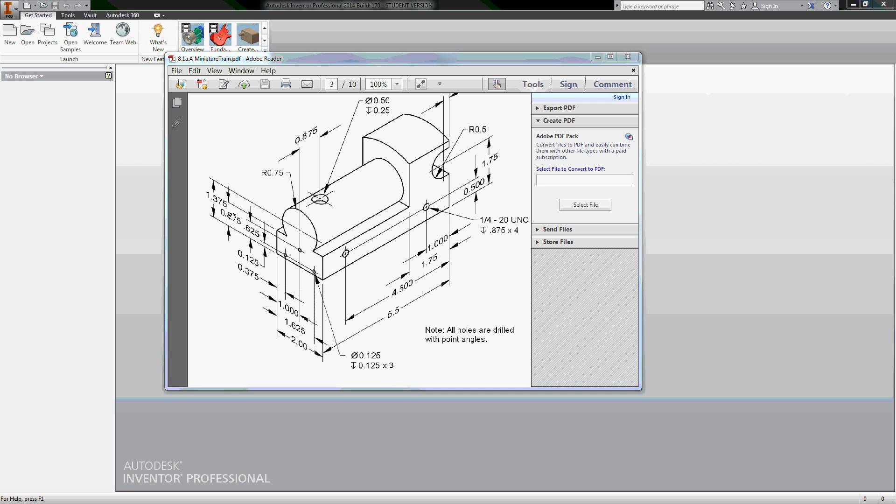So if I look, the rectangle has a dimension of 2, and over here it has a dimension of 0.875. So I'm going to go ahead and build that rectangle first with a sketch. I'm going to hit new, do a standard part, create a sketch, and make my rectangle. So my rectangle was 2 by 0.875. Alright, so there's my rectangle.

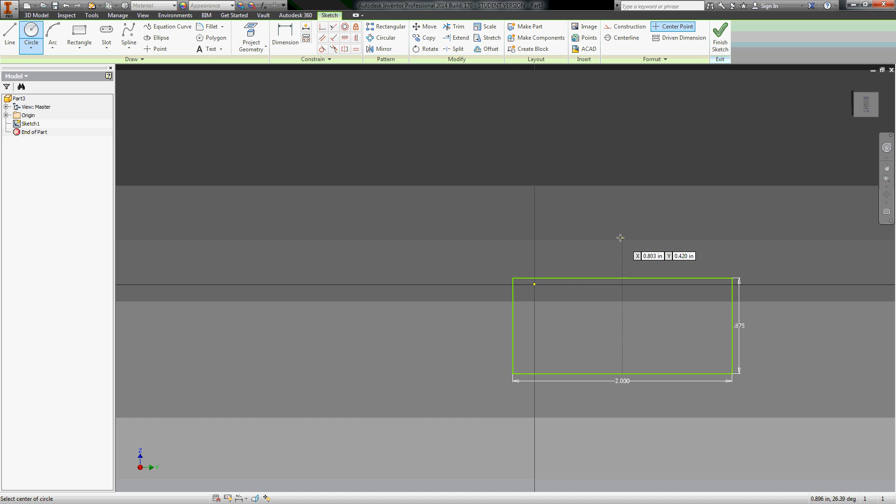Now I'm going to create a circle, and the circle was centered up, so I have this little dotted line right here, and I'm going to look at my dimension for my circle. It says a radius 0.75 because it's really only an arc. So I wanted a diameter of 1.5. So I'm going to click on this, dimension it and make it 1.5, and that gives me the right size circle that I need.

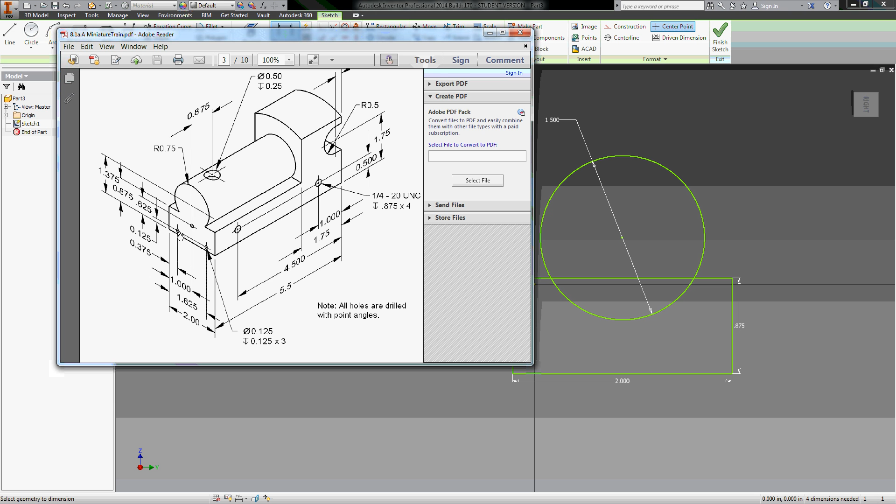But the problem is I need to place the location of the center of the circle. If you follow the mark over here, it comes to 1.375. So from the bottom of the train to the center of that circle, or the center of that arc technically, is 1.375. So I'm going to dimension that from the bottom here and make that 1.375. And we should be all centered up and ready to go.

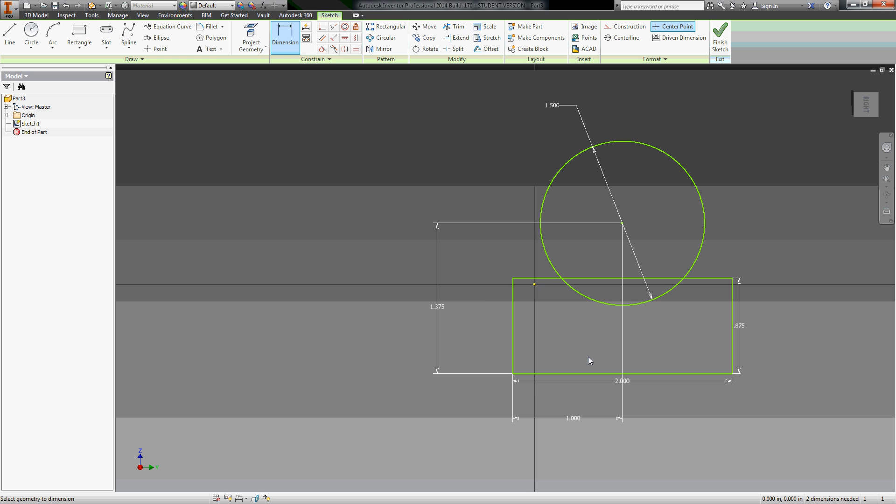If you want to be safe to make sure that this is locked on the middle, we can always click here and here and come down and make sure it's 1, and then check it off, and that locks it in. So now I got my circle and my rectangle. I'm just going to come up here and hit trim. I'm going to trim out the bottom of the circle, trim the front of the rectangle, and there is my sketch that I need to extrude.

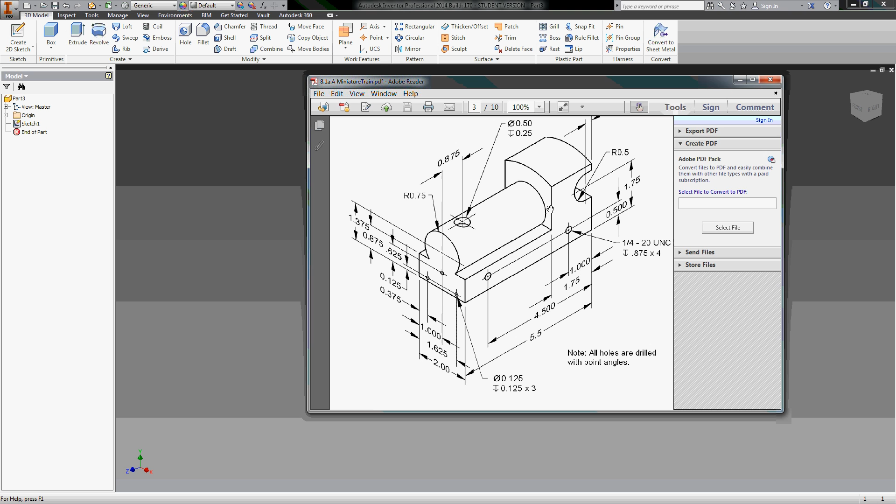So I want to extrude this back. What's the distance? I want to extrude it from here to the edge of this piece right here. Well, the total length of the train is 5.5, and from the back of the train to the cabin is 1 inch. So I need it to be 4.5 inches. So I'm going to extrude, click my region, and change it to 4.5 inches. Okay, and so far we have the front of that train.

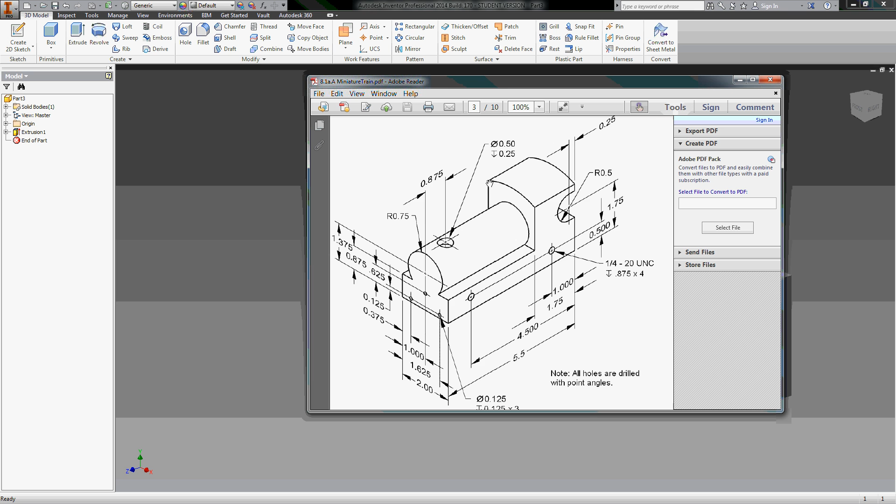Okay, now for the back part of the train, I want to take a look at my image again, and here it is right here. You can see it's rectangular in structure coming out here, but there's this arc. If we go down to the next page, you get a little better information on the arc. So we know that this is the full width of the rectangle, but how high this whole thing is, is our problem to figure out.

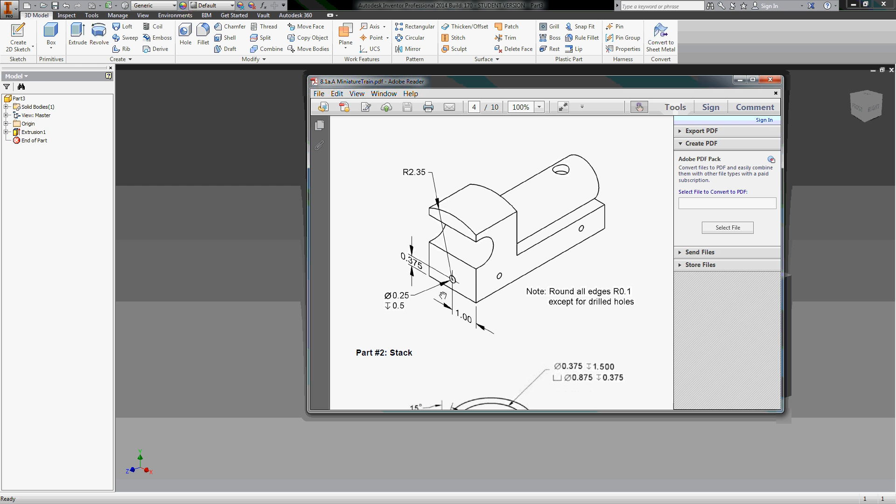Well, the way you can tell is if you see this point where this hitch is going to be, it's actually an arc up here, and it says it's a radius of 2.35 starting at this point right here. And that point is 0.375 up and 1 inch in, or centered in. So I'm going to make a sketch right here. I'm going to flip this over.

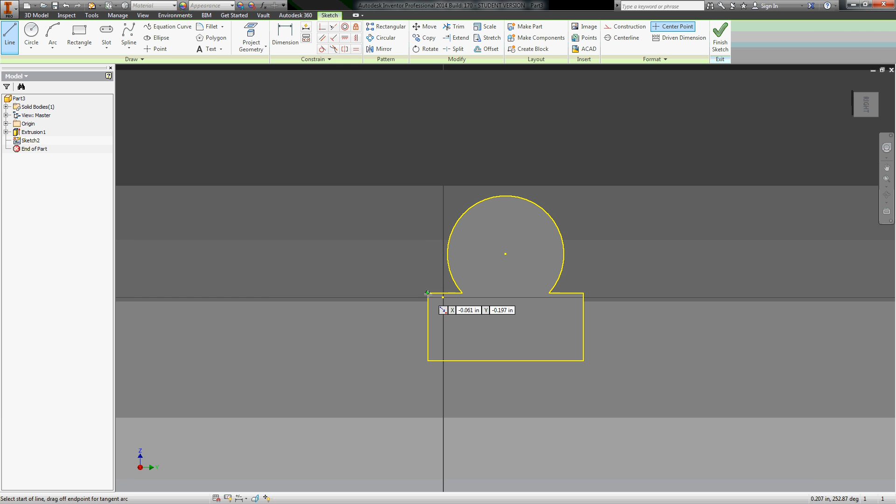And then I'm going to take a line up here. Oops, I didn't want to do that. Sorry about that. I'm going to extend my line up from this point up. You know, we can trim stuff off, it's not a problem. Do the same on the other side.

And then I'm going to go ahead and drop a point down right here, and it should be centered up. And the height of that point we said was 0.375. So I'm going to go ahead and dimension from here to here, and that guy is 0.375 in height. And he's already centered. I centered him, but if you want to again verify it's centered, we can click from here to here and make sure it's 1 inch. And there we go. So I have my point now.

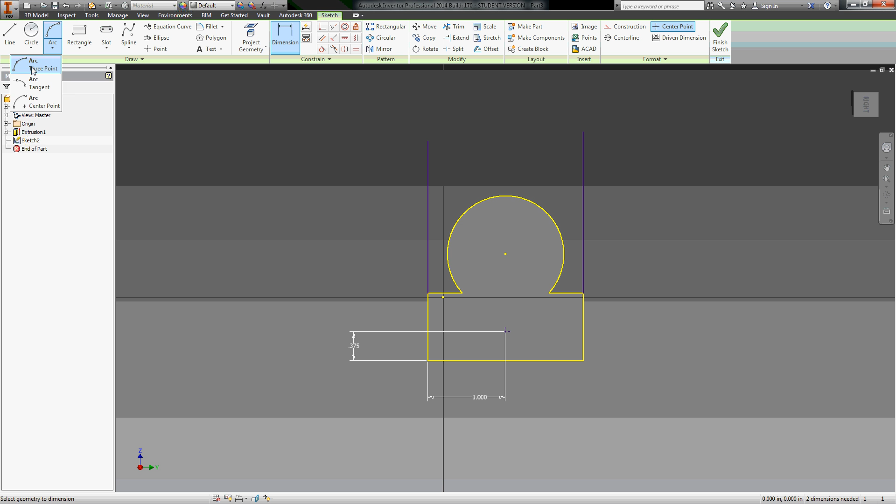So I can now do an arc. And we have 3 different types of arcs that we can do. We can do an arc with a center point, we can do an arc tangent, and our 3-point arc. I'm going to use the center point arc right here. And I'm going to click on this point right here, and the radius of the arc was 2.35. So I'm going to type in 2.35, and then I'm going to go ahead and sweep my arc.

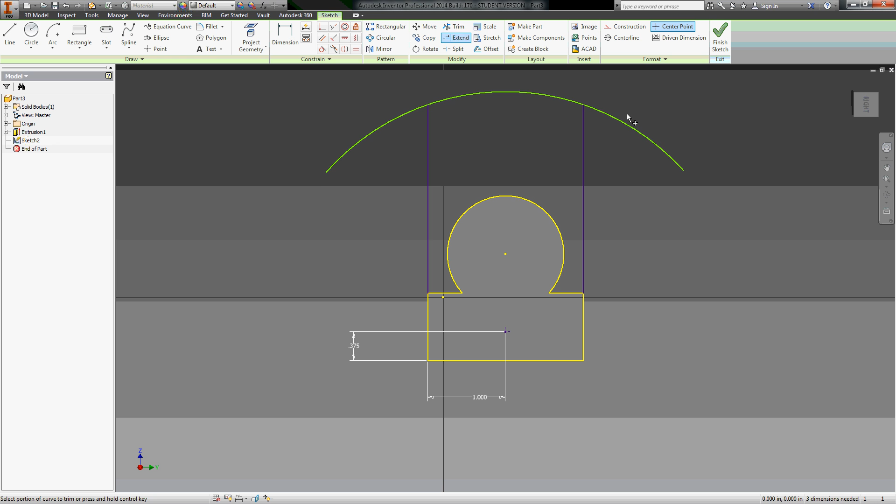Like that. So I now have the arc that I need, the height that I need, so these lines aren't long enough, are they? So I probably could have just went ahead and did the arc first, but no big deal. I'm just going to extend the lines up to the top, and then I'm going to go ahead and trim the sides off. So it probably would have been easier if I would have built the arc first and then extended the sides up to it. All right, so now I have the back cabin for my train that's ready to go.

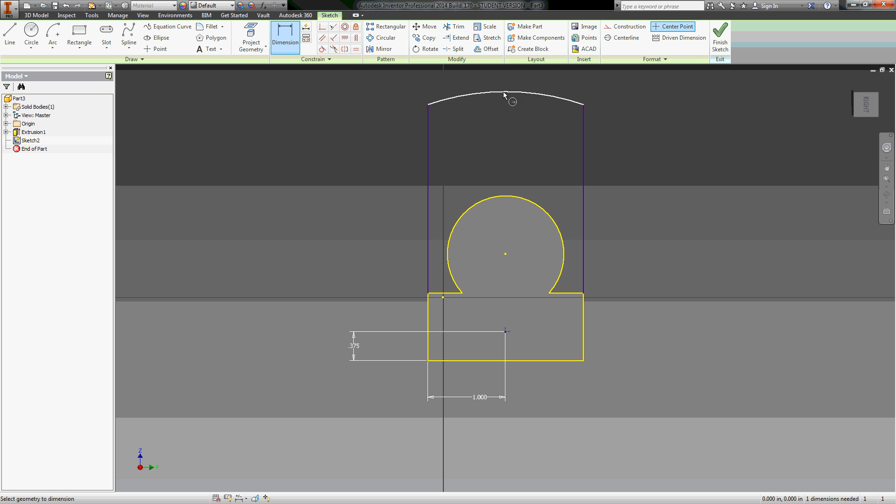Okay, actually looking at this, something doesn't look right on this arc. It looks really tall to me compared to the drawing. So what I'm going to do is I'm going to dimension this arc right here, and it's at 3, so clearly I didn't get my 2.35 typed in there. So I'm going to change this to 2.35, check it off, and it brings it down for me. All right, now I'm ready to roll.

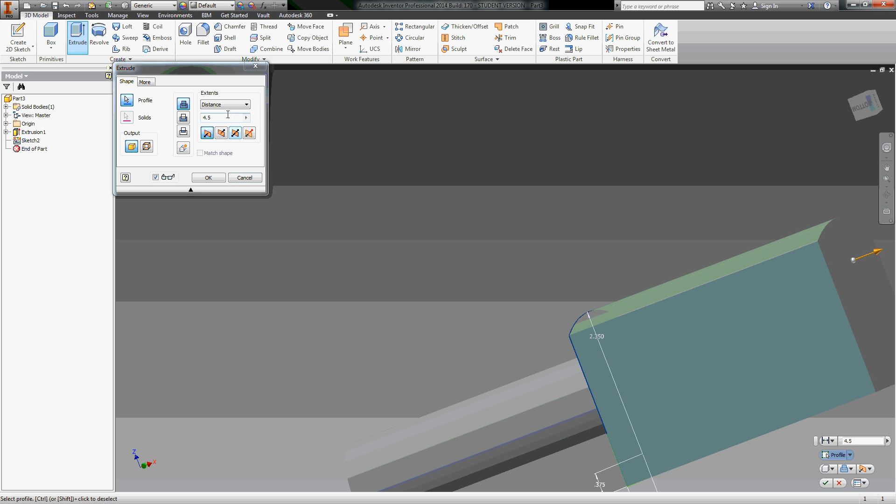So I can go ahead and finish my sketch here, and then I'm going to go ahead and extrude this region and the other region down here, both of them together, and I want to extrude those 1 inch because that's how much further back that cabin was. And there is my cabin for my train.

Okay, so again, I'm looking at this train, and I am a total bonehead here. And this is okay, and this is why, when you look at it, something doesn't look right. Look how skinny my cabin is and how long the body of the train is. So I come back over here and I look at my train, and I realize I read this wrong. It was the wheel hole, the hole that was 1 inch. It's actually the cabin that's 1.75 inches.

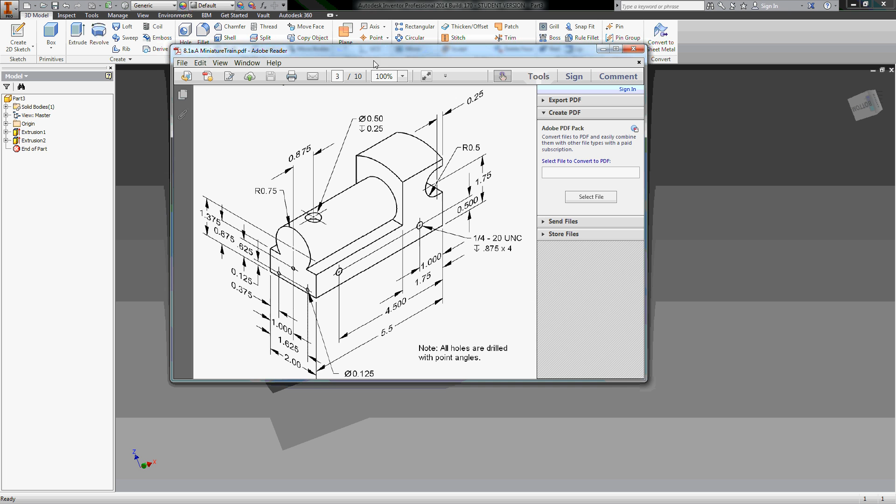So this length here that we did as 4.5 inches is too long. I need to take another 0.75 inches off of that. And then this length is too short. It should be 1.75. So I'm going to come back in. It's easy to fix these things, right? So I'm going to start with the first extrusion. I'm going to double click on it. Remember I made it 4.5. So if your math isn't very good, it was 5.5 and we subtract off 1.75.

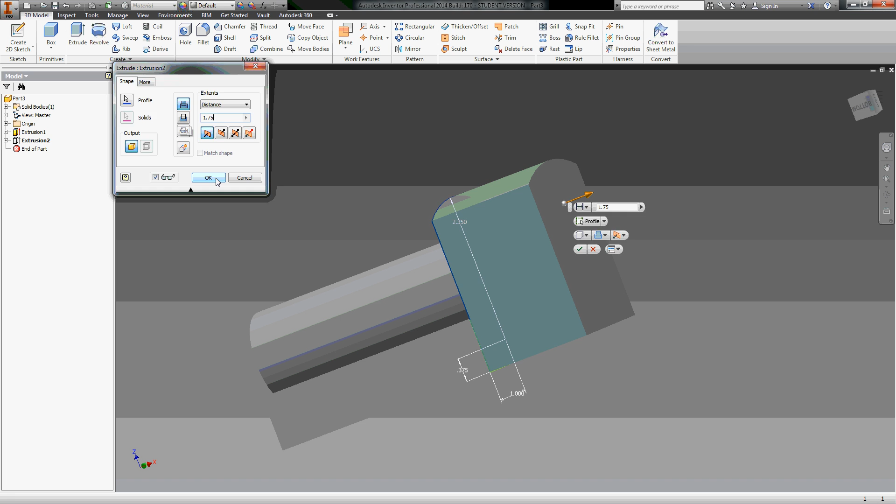And there's the length. I've now made the front of the train the right length. And then I can click on extrusion 2, and we said it was supposed to be 1.75, and I just changed it to 1.75 and hit OK. Now there we have the right size for the train body. So this is how you build the train body, including with my silly mistakes. And in the next video, I'll show you how to place the holes and to drill the hole out right here.